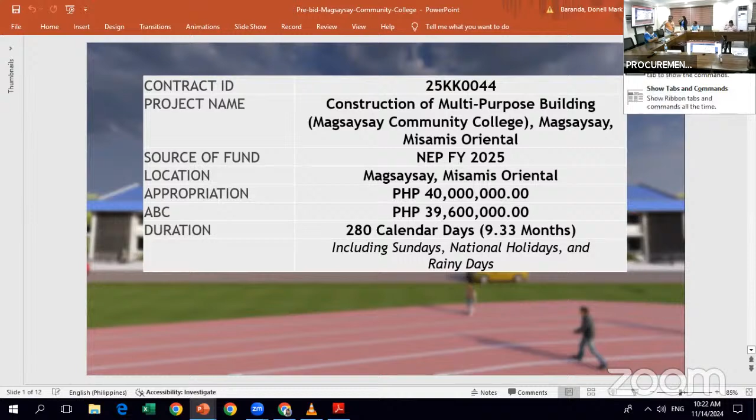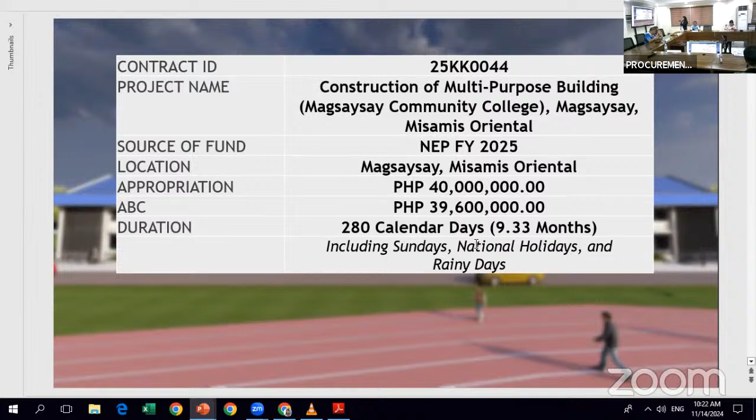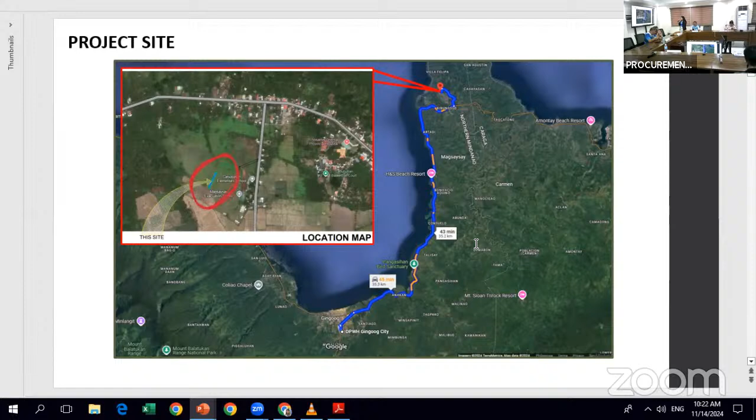Hello, good morning, everyone. So for our first project, we have 25KK0044, or the construction of multi-purpose building, Magsaysay Community College, Magsaysay, Misamis Oriental. So our appropriation is 40 million. The ABC is 39,600,000. The duration of the project is 280 calendar days. So this is the project site. Next, please. This is the site development plan. The perspective of the building.

So the project scope, we have construction of multi-purpose building in Magsaysay Community College, Magsaysay, Misamis Oriental. A two-story 6 classroom building where the scope consists of the following. So we have an embankment of 1.4 meter. This equates to 1,093.40 cubic meters of common soil. So our first two-story 6 classroom unit has complete structural components. This includes reinforced concrete footing, columns and beams, complete roof trusses and roof sheets, including all roofing accessories.

This includes ridge roll, downspout, and flashings, complete ceiling with reflective insulation, complete concrete gutter with cement base, liquid and membrane waterproofing, complete masonry and finishing works, complete doors and windows, complete plumbing and sanitary works, complete septic tank, complete cistern and water pumping system, and complete electrical works. So the second two-story 6-classroom building, due to budget constraint, only has complete structural components, complete roof trusses and roof sheets, complete concrete gutter with waterproofing, complete CHB walls, complete doors and windows, complete plumbing and sanitary works, complete septic tank, and electrical roughing-ins.

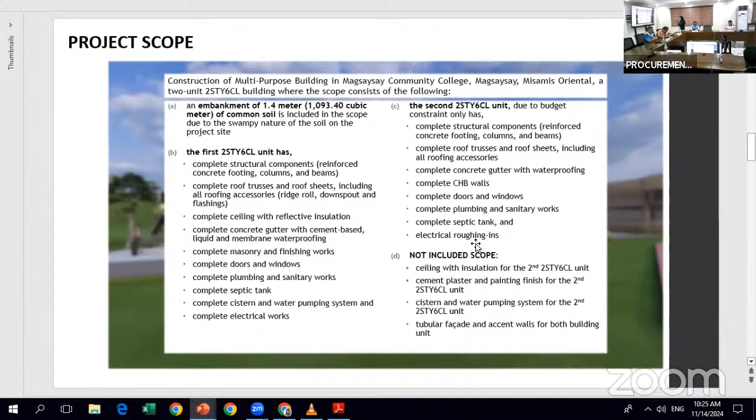So not included in our scope is our ceiling with insulation for the second two-story 6-classroom unit, cement plaster and painting finish for the second unit, cistern and water pumping system for the second unit, and tubular facade and accent walls for both building units. So these are the summary of quantities. We have provision of field office for the engineer, rental basis, permits and clearances, project billboard, signboard, occupational safety and health, mobilization, demobilization, general scaffolding and shoring and netting, structure excavation, common soil, embankment from roadway, structure excavation, common soil,

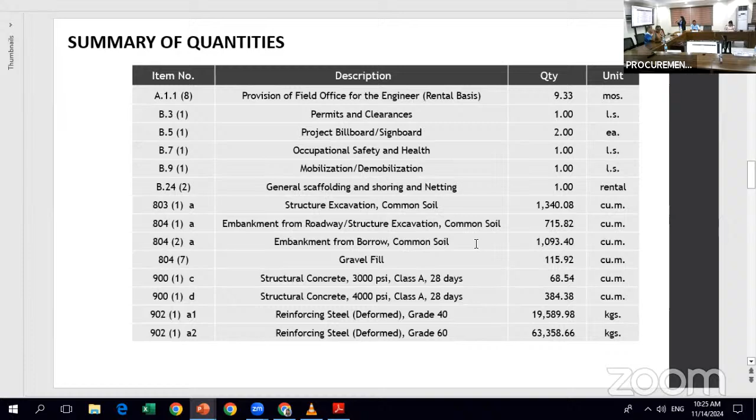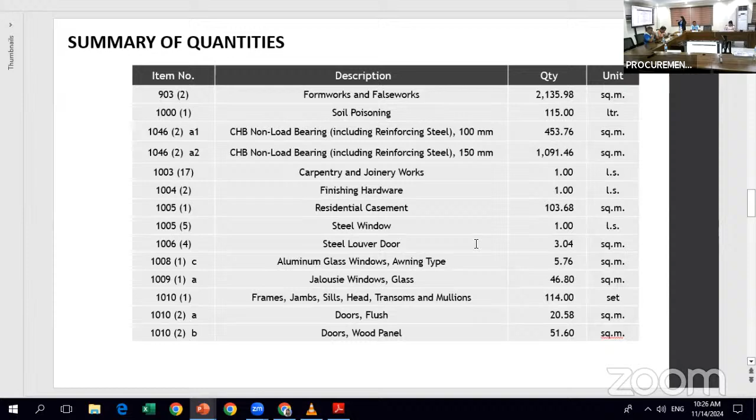embankment from borrow, common soil, gravel fill, structural concrete, 3,000 and 4,000 PSI, Class A 28 days, reinforcing steel, deformed, both grade 40 and 60, formworks and falseworks, soil poisoning, CHB non-load bearing, including reinforcing steel, both 100 and 150 mm, carpentry and joinery works, finishing hardware, residential casement, steel window, steel louver door, aluminum glass windows, awning type, jalousie windows, glass, frames, jamb, sills, head, transoms, and mullions, doors, both flush and wood panel, ceiling, 4.5 mm, metal frame, fiber cement board, molding, concrete waterproofing, both cement base and liquid, built up and preformed membrane, glazed tiles and trims, unglazed tiles, cement floor finished with floor hardener, cement plaster finish, reflective insulation, railing, painting works for both masonry, wood and steel.

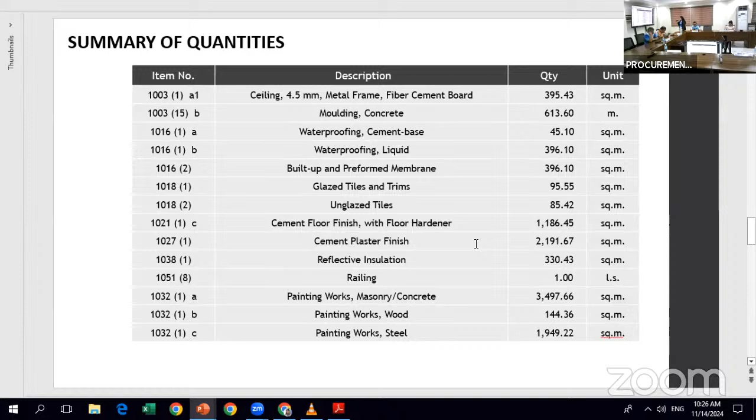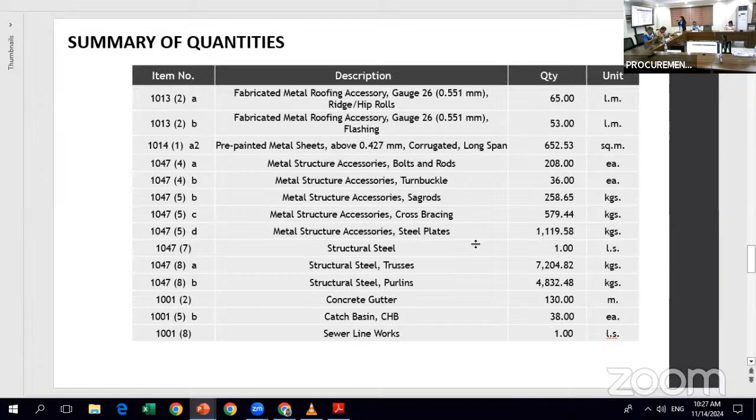structural steel for both trusses and purlins, concrete gutter, catch basin, CHB, sewer line works, storm drainage and downspout, septic vault/tank, concrete/CHB, plumbing fixtures, cold water lines, cistern.

So for electrical, we have conduits, boxes, and fittings, wires and wiring devices, panel board with main and branch breakers, and lighting fixtures. So for mechanical, we have water pumping system and fire alarm system.

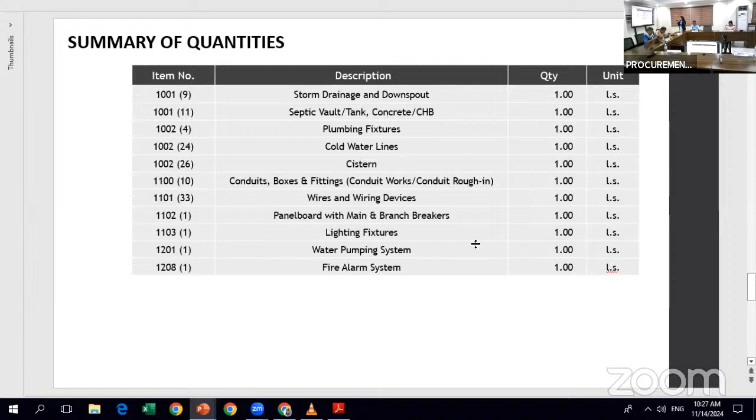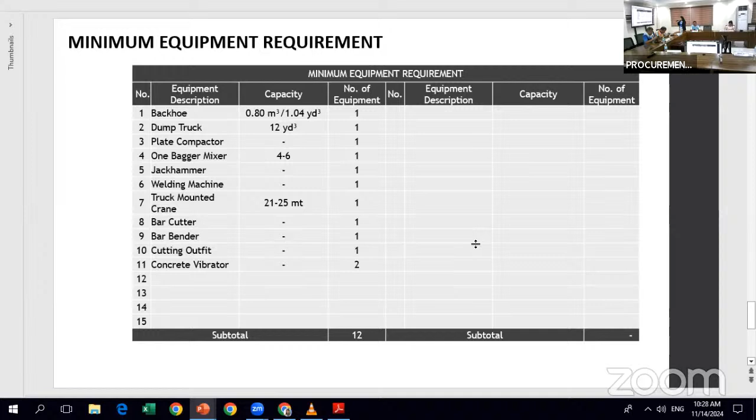Minimum equipment requirement, we have one backhoe, one dump truck, one plate compactor, one bagger mixer, one jackhammer, one welding machine, one truck mounted crane, one bar cutter and bar bender, one cutting outfit, and 2 concrete vibrators. So that will be all.

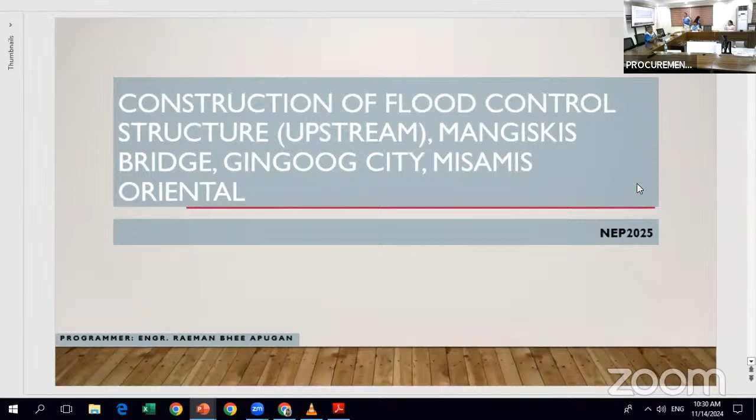So, we will proceed for the next project. Engineer Raeman. Next project is construction of flood control structure, Upstream, Mangiskis Bridge, Gingoog City, Misamis Oriental.

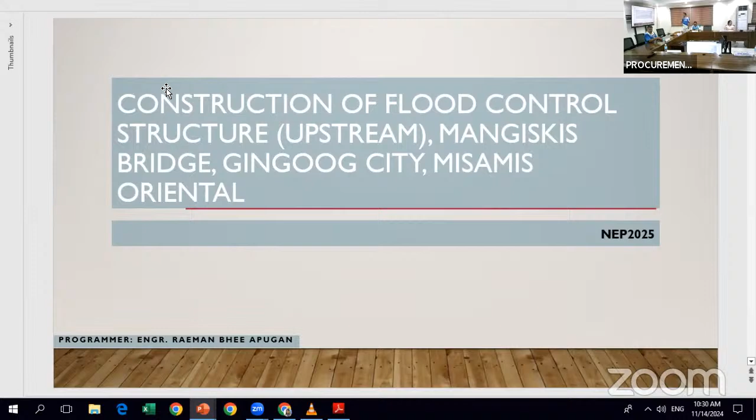So, excuse me, Engineer Raeman. So, may I ask from the procurement staff if there is clarification from the YouTube live viewers? None, so we proceed.

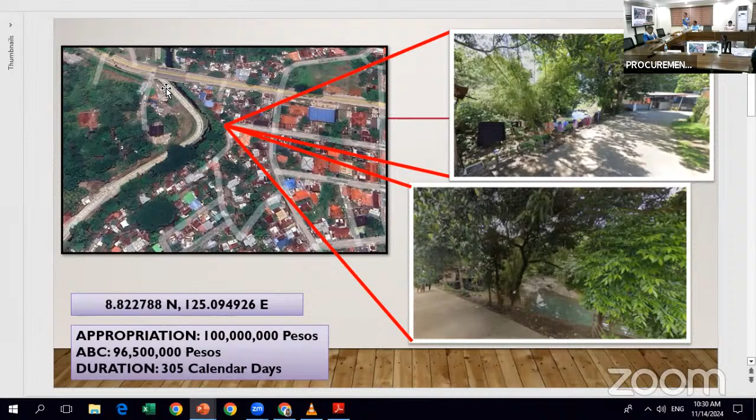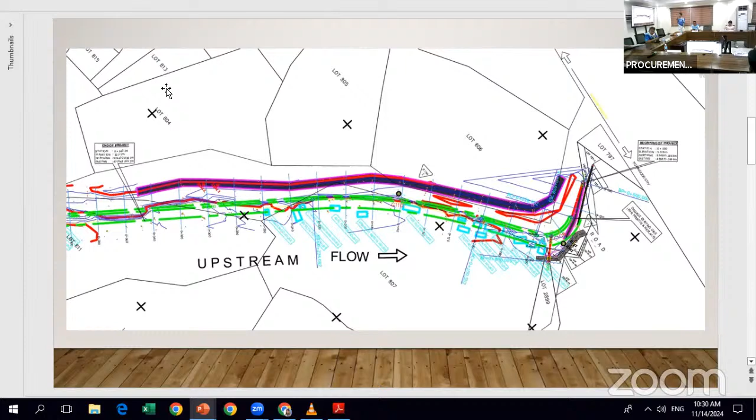With an appropriation of 100 million and ABC of 96,500,000 with a duration of 305 calendar days. These are the location and geotag photos of the project site. So the topographic plan of the project, the color green, the alignment of the project. Next.

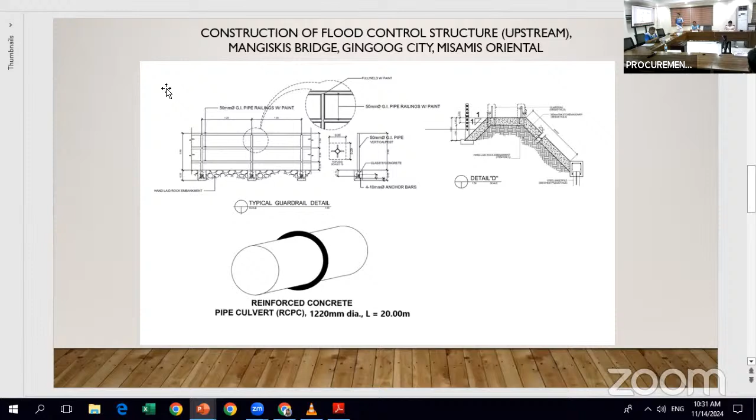The details of the top of the revetment or crest, the provision of pipe railings 50 in diameter, GI pipes, and the reinforced RCPC with a diameter of 1,220, total length of 20 meters. Okay. So these are the typical plan of the structure.

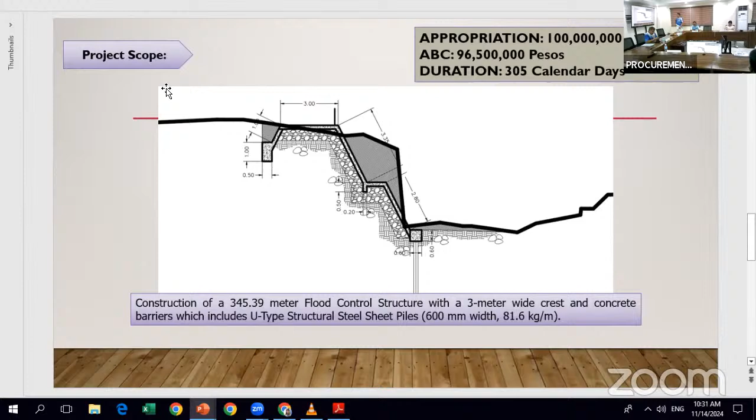The construction of 345.39 meters of flood control structure with 3 meters wide and concrete barriers, GI pipe railings, which include U-type structure, steel sheet piles, 600 mm width with 81.6 kilogram per meter.

So the bill of quantities, we have provision of field office of the engineer, project billboard and signboard, occupational safety and health, mobilization and demobilization, individual removal of trees, ranging 301 to 500 in diameter, removal of structures and obstruction, concrete, clearing and grubbing, structure excavation, common soil, embankment from roadway or structure excavation, reinforcing steel, grade 40,

structural concrete, 3,000 PSI, class A, with 28 days, then concrete pipe culverts, class 4 RCPC, concrete slope protection, hand-laid rock embankment, structural steel sheet piles, furnish, and structural steel sheet piles, driven, then metal railings.

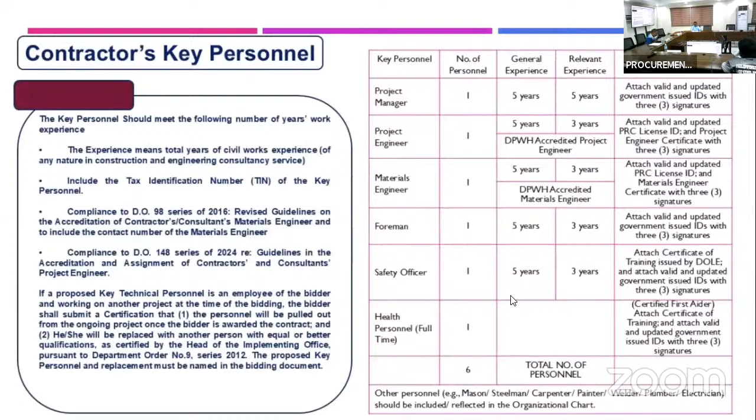The last personnel is one full-time health person. Note that a certificate of training and a valid and updated government issued ID with 3 signatures. All in all, there should be 6 total number of personnel. Other personnel such as the mason, steelman, carpenter, painter, plumber, or electrician should be included or reflected in the organizational chart. Contractor's major equipment units.

The contractor is required to provide proofs of ownership and other supporting documents for equipment owned, or lease agreements for leased equipment, and for equipment under purchase agreements, provided a certificate of availability from the equipment lessor or vendor for the duration of the project. Proof of ownership and other supporting documents for equipment pledged must specify and indicate the model or unit, capacity, performance, or size, plate number, motor number, chassis serial number, engine serial number, specific location and individual photos for the department or the DPWH units.

Contractor's minimum material testing. Please refer to the DO number 11, series of 2017 for minimum material testing. DPWH requirement for infrastructure typically requires submission of the materials testing equipment as stated in clause 5.6.2.a technical proposal and clause 5.6.2.a.4.c project requirements, in form DPWH INFR 15, list of contractor's major construction and laboratory equipment units to be assigned to the contract, supported by certification of availability.

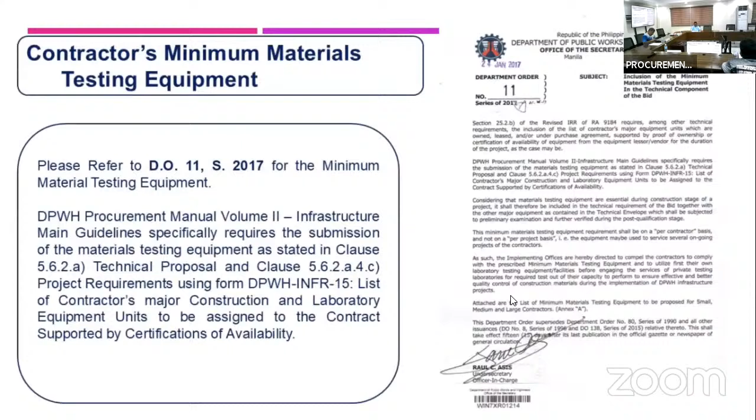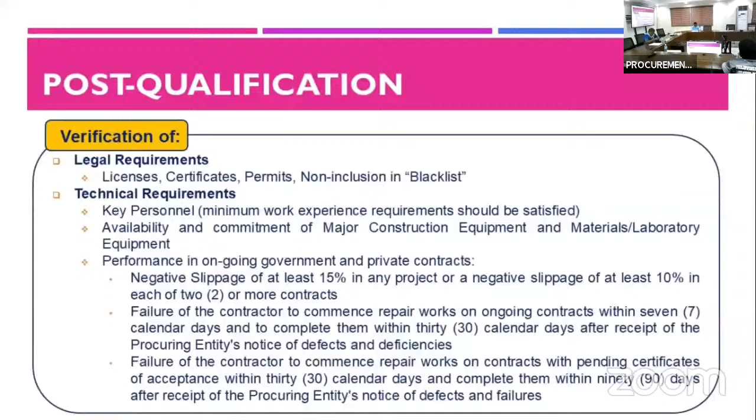Negative slippage of at least 15% in any contract, or a negative slippage of at least 10% in each of 2 or more contracts. Failure of the contractor to commence repair works on ongoing contracts within 7 calendar days and to complete them within 30 calendar days after receipt of the procuring entity's notice of defects and deficiencies. Failure of the contractor to commence repair works on contracts with pending certificates of acceptance within 30 calendar days and complete them within 90 days after receipt of the procuring entity's notice of defects and failures.

Verification of technical requirements: substandard quality of work as per contract plans and specifications, or unsatisfactory performance of contractual obligations as per contract terms and conditions at the time of inspection. Verification of financial requirements: bid as proposal and NFCC.

Contract award. The contract shall be awarded to the bidder whose bid has been determined to be the lowest calculated and responsive bid, or LCRB, as a result of the detailed evaluation and post-qualification conducted. The successful bidder shall be notified through the issuance of notice of award within the bid validity period and must be confirmed by the successful bidder in writing within 10 days upon receipt thereof, in accordance with section 37.2.2 of the 2016 revised IRR of RA 9184.

Common reasons for rejection of bids, ineligibility, and post-disqualification of bidder. 1. Failure to submit original copy of the surety bond certified by the Insurance Commission indicating the name of contract, the procuring entity, and name of contractor. 2. Shorter bid validity and bid security validity period. 3. Overlapping of pledged equipment and committed key technical personnel. 4. Failure to indicate the validity of bid in the bid form.

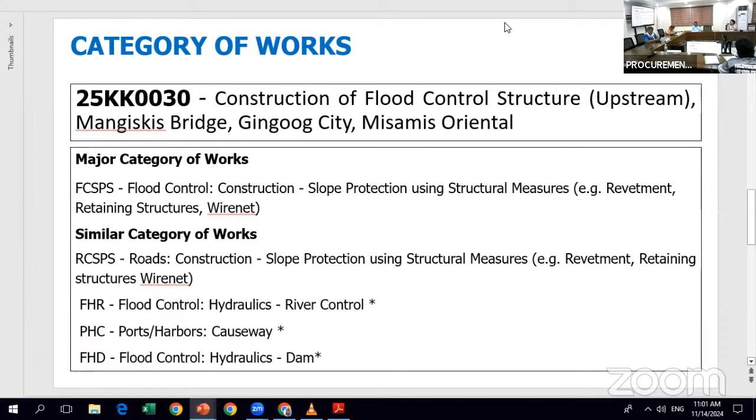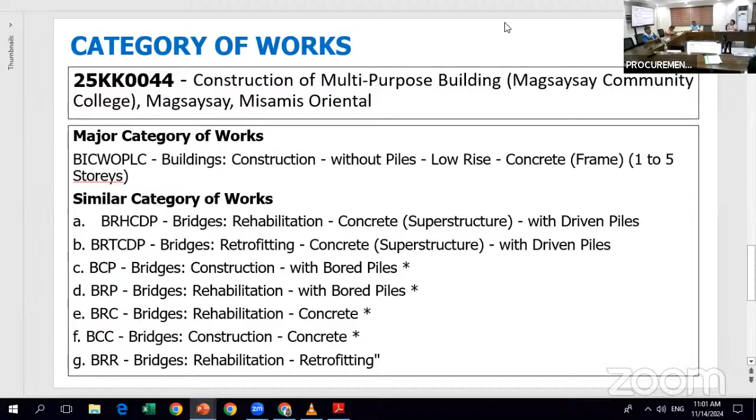Also, for contract ID 25KK0044, the category is BICWOPLC, or buildings construction without piles, low-rise concrete frame for 1 to 5 stories. And as shown, this is a sample of the technical and financial documents to be submitted. The bid and supporting documents should be sealed and properly bound. So that's all, Mr. Chair. Thank you.

Thank you, Engineer April, for the reading of the procurement schedule and the additional requirements and category of works. So, any questions, ma'am, from the YouTube viewers on what was presented? None from the YouTube side. So since there are no more clarifications and questions, any motion for the adjournment of this pre-bid conference for civil works dated November 14, 2024?

Chair, I move the adjournment of the pre-bid conference for civil works, November 14, 2024. I second, Mr. Chair. It has been moved and seconded, the adjournment of this pre-bid conference for civil works. I now declare this pre-bid conference for civil works, November 14, 2024, adjourned.